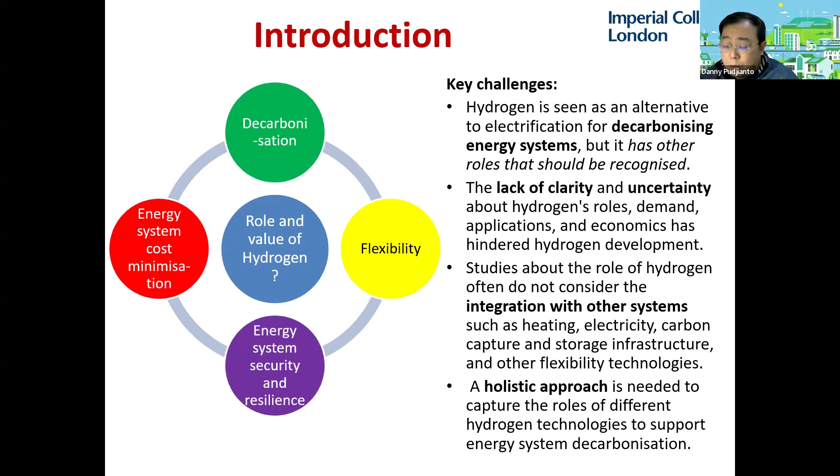So this is just to give the result of the studies that we carried out, analyzing two cases. One is the electricity system and the hydrogen system planned separately, which is what we call a silo approach. So in the electricity system, basically there will be no hydrogen technologies, no electrolyzers or hydrogen power generation. And we compare that with when we integrate hydrogen and electricity together, which we call the integrated approach. And we evaluate the annual system cost of these two systems.

And here we found that the integration of hydrogen into the electricity system can save quite substantially, around 5.6 billion pounds per year. If you look at the diagram on the right-hand side, the negative values reflect the savings that the system can obtain with hydrogen technologies. The positive costs are the additional infrastructure that needs to be built to support these hydrogen technologies. So hydrogen technologies, like electrolyzers and hydrogen power generation, will require additional low carbon technologies.

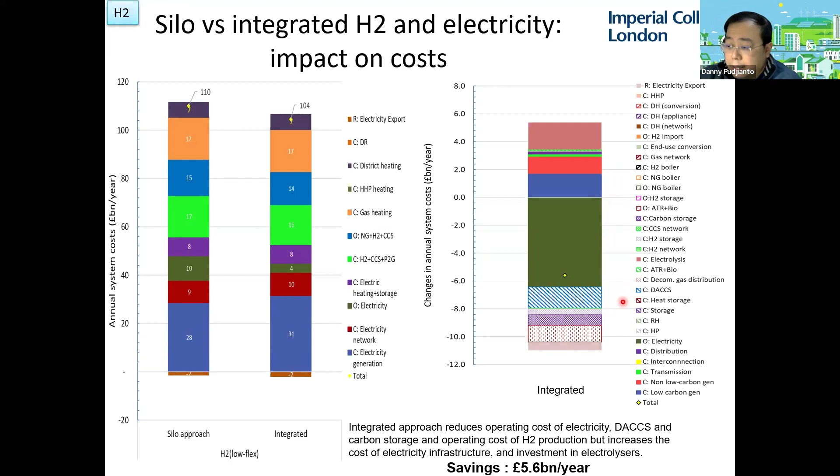So we can also see from these slides that by integrating the hydrogen technologies like electrolyzers and hydrogen power, the system can accommodate more renewable energy sources, like offshore wind, which increases from 86 gigawatts to 120 gigawatts, but also displacing, for example, the gas CCS.

So in the system where there are no hydrogen technologies, the system will require around 30 gigawatts of gas CCS, but then we can displace it totally with the hydrogen technology. So it's reduced to zero, while increasing the need for hydrogen power generation in that context.

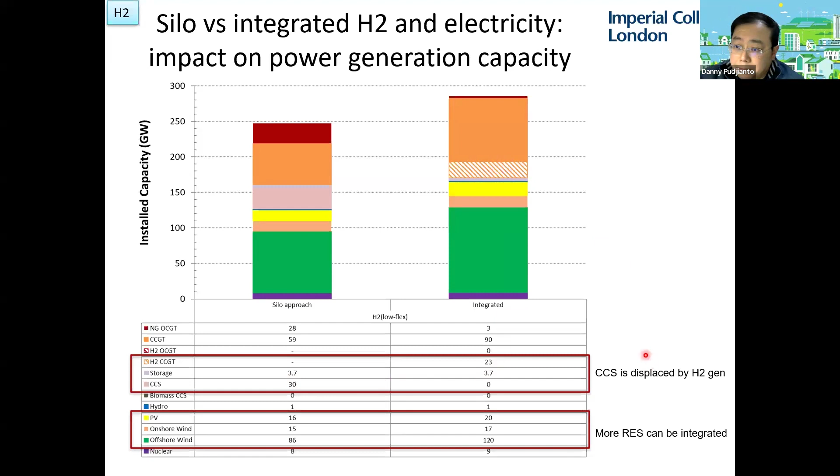So how should we analyze the system with hydrogen? So here we have developed a model called the integrated whole energy system model. It is a very large optimization problem which tries to minimize the overall energy system costs, including electricity, gas, hydrogen, heating, and also the CCUS infrastructure.

We take into account from the supply side and the energy network up to the demand side, but also some flexibility technologies such as demand side response, flexible generation, interconnection, and storage. We also model sufficiently the spatial granularity of the demand and the energy resources in GB, and also the interconnection between GB and Europe and Ireland.

And one quite unique feature of the tool that we have developed is that it also includes the distribution, where we represent the distribution networks as two types, rural and urban, in order to analyze the impact of hydrogen technologies or other low carbon technologies connected to those distribution networks. Because the impact is not only on the local distribution system, but will also affect the upstream system.

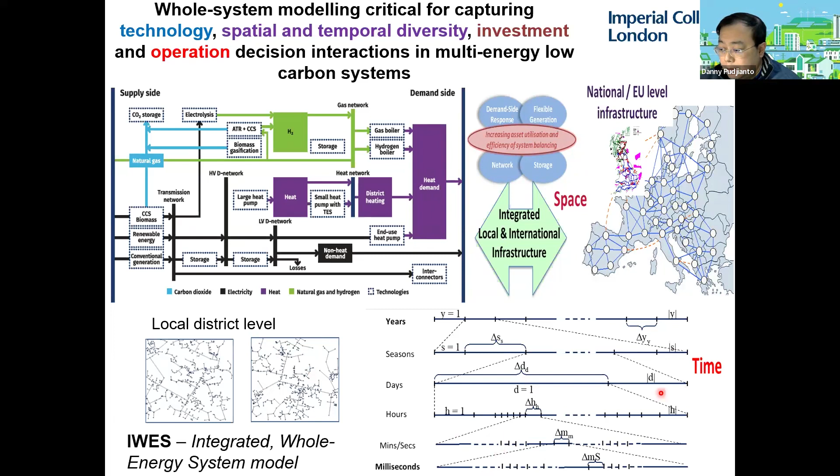So this is a list of the input data for the tool that we use. We take into account the load profiles for years for different types of energy demand, like electricity, space and hot water heating, transport, for both domestic and non-domestic sectors. We take into account all the technologies from power generation, hydrogen production, hydrogen storage, hydrogen transport, and so on, and we also consider the CapEx and OpEx of all of those technologies.

We also take into account the constraints associated with the scenarios that we analyze, for example, the emission target or the export-import energy policies. Now the output data: from the modeling, what we are after is to understand the optimized multi-energy infrastructure portfolio proposed by the model, and how the multi-energy operation should be coordinated.

And then, of course, we can evaluate the techno-economic performance of the technology, the fuel usage, how much carbon capture and storage there will be, the residual emissions that need to be offset, energy exchange, capacity sharing across regions, and also the flexibility technologies that need to be deployed, considering all this multi-energy sector coupling flexibility.

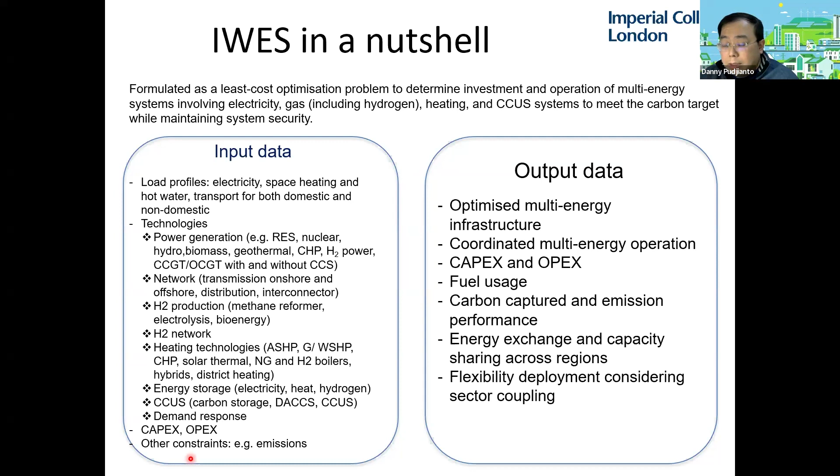Now for the case studies, here we focus on the 2050 future energy scenarios. We take one of the National Grid future energy scenarios called Leading the Way, which has the most ambitious target in renewable energy and customer participation in providing system flexibility.

In preparing the scenario, we understand the requirements for the system in order to meet the extreme events, which happen very rarely but need to be considered in the system planning in order to ensure that sufficient energy system capacity will be provided to meet the peak demand and to withstand that kind of event.

So we have inserted a few days of very cold conditions with low renewable energy sources to test the system's resilience. And in that context, we can then evaluate the role of hydrogen in providing resilience to the system. And then there are a number of other details like that.

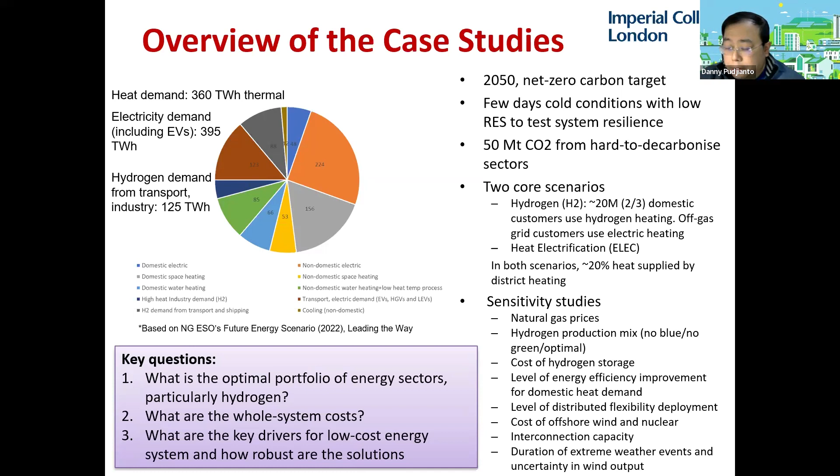And this slide shows the hydrogen portfolio of these two core scenarios, hydrogen for heating, H2, and full heat electrification, ELEC. You can see that hydrogen power generation technologies, hydrogen CCGT and hydrogen OCGT, have been proposed by the model, which means they are quite competitive against other power production technologies. In addition, there are hydrogen production technologies, like autothermal reformers with CCS producing blue hydrogen, electrolyzers producing green hydrogen, and hydrogen from biomass energy with CCS, plus some hydrogen storage, as you can see.

And the last two columns in the table show the utilization of these hydrogen assets. What we can learn from this study is that hydrogen technologies are actually quite competitive against other low carbon technologies, because the model shows that we require this much hydrogen technology in order to minimize the overall system costs. There are around 104 gigawatts of hydrogen power and production capacity proposed here, irrespective of whether it's hydrogen for heating or full heat electrification, and around 6.4 of hydrogen storage needed.

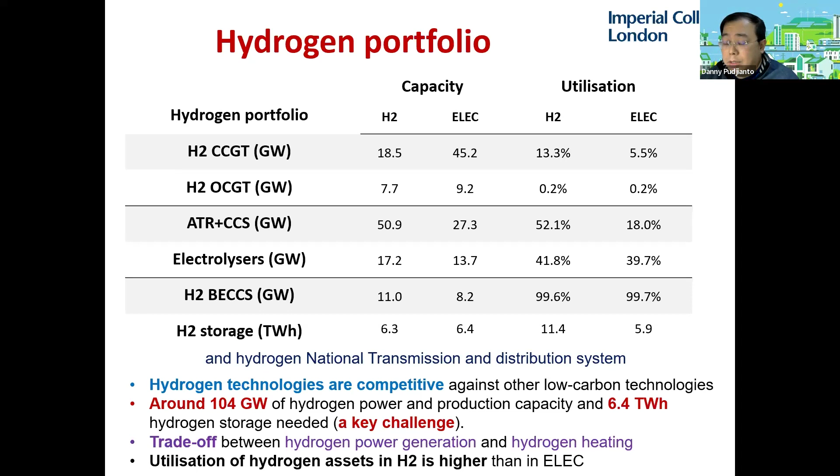So this slide shows the role of different hydrogen technologies. Different hydrogen technologies will have a different role in the system, and they have to play together in order to optimize the whole system operations. And this synergy has to be taken into account.

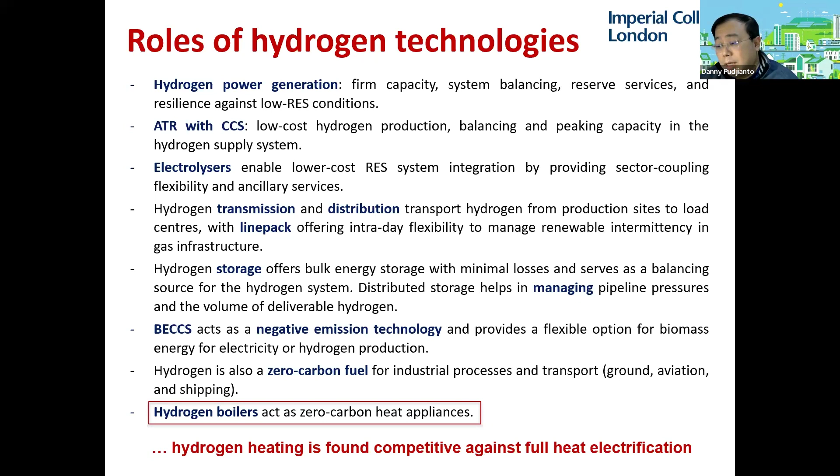Just to highlight one, the hydrogen boiler as a means to decarbonize heat in the domestic and commercial sectors can also play a part in the synergy with the whole hydrogen system. So the study shows that hydrogen heating is actually quite competitive from an economic point of view against full heat electrification.

Now from the model, we can also analyze the annual system costs for these two different scenarios. With hydrogen for heating, you can see that the annual system cost is 85.6 billion. This cost includes the whole electricity sector infrastructure, from the capex and opex of electricity generation, network, electricity storage, and so on.

This also covers the cost of the hydrogen system, from the hydrogen and carbon capture and storage system, capex and opex, the heat infrastructure, and the cost of the flexibility technologies required, such as demand response. We can see that with hydrogen for heating, the annual system cost is lower compared with full heat electrification. It is primarily because, and we will discuss this in more detail, the cost of electric heating, in this case the heat pump, is quite large.

The right-hand diagram shows the primary energy supply for both scenarios. Hydrogen for heating will require more than 1,000 terawatt-hours per year, compared with around 840 terawatt-hours per year in full heat electrification. That's expected because heat pump efficiency is much higher than that of the gas boiler. So the overall energy system efficiency in full heat electrification is much higher, more than 100%, compared with around 80% for hydrogen for heating.

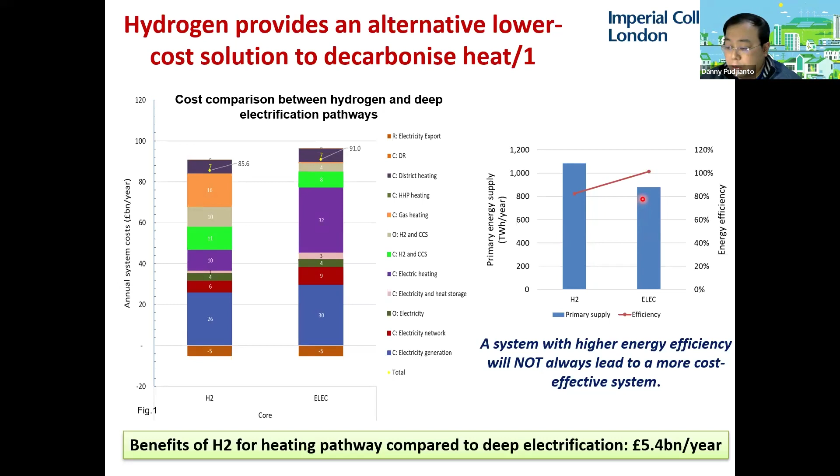But because this is achieved by investment in more expensive heating technologies, and the system integration cost of the heat pump is much higher compared with the hydrogen boiler, the cost of the system is actually higher in this context. So a system with higher energy efficiency will not always lead to a more cost-effective system. That's one of the key findings of the studies that we carried out.

So this is the difference between hydrogen for heating and full heat electrification. With hydrogen for heating, we can reduce the need for investment in low carbon generation and distribution, associated with the smaller electricity peak demand. We can also reduce the investment in heat pumps, which is quite high, and other electric heating, and also the flexibility requirement to support the heat pump, such as heat storage.

But on the other hand, we have to increase the investment in blue hydrogen production from autothermal reformers with CCS, there will be some increase in carbon storage requirements and in the use of gas to produce hydrogen, plus investment in hydrogen boilers, and we also have to maintain the gas network.

So this slide shows the impact of these two different scenarios, hydrogen for heating and full heat electrification, on the power generation capacity portfolio, where we can see that in the heat electrification scenario, there is a significant increase in the requirement of the generation capacity associated with the increase in the electricity peak demand, which is shown on the right-hand side. So in the full electrification, the electricity peak demand increased to 115 gigawatts, while in the hydrogen heating, this is only up to 87 gigawatts.

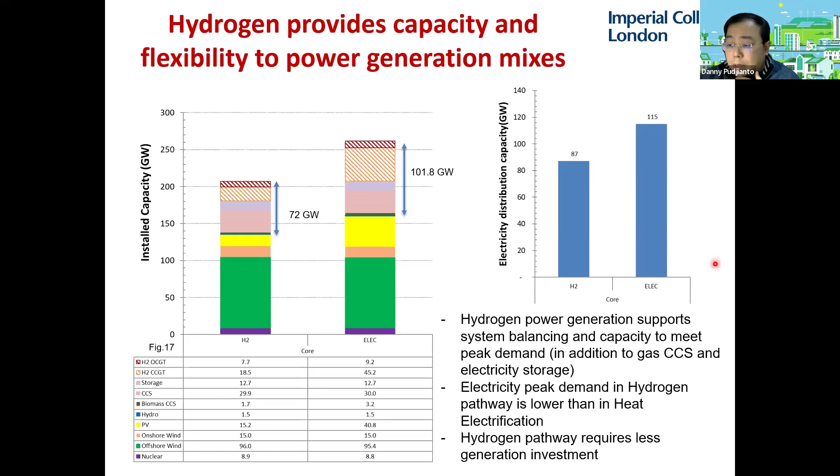So this slide shows 7 days in the winter peak week, where the system is stressed on day 16 to 18 because of very cold conditions. So the temperatures plummeted to -6 something, and at the same time there is no wind. So you can see that the offshore wind here produces very little compared with the

normal days. So in order to cope with this event, the system has to start operating with the gas CCS, but also with the hydrogen power generation here, in addition with some support from the interconnection, importing power from the neighboring countries. While on the other hand, when moving to the next day, there is a significant wind output increase, and then there is a balancing issue in this context, where the electrolyzers will be able to support the supply-demand balance by absorbing the excess wind output and producing hydrogen.

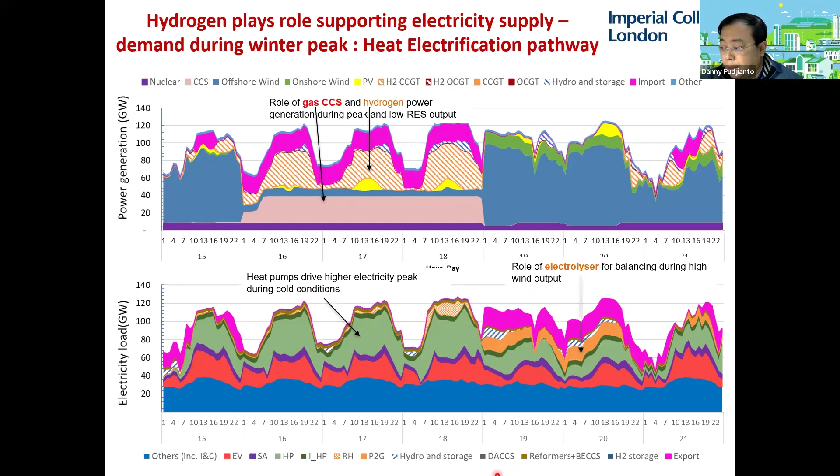So from the model, we can also analyze the demand and the supply of hydrogen. The demand for hydrogen in the hydrogen for heating scenario comes from three main sectors. One is hydrogen used in power generation, which is relatively small compared with the overall annual hydrogen demand. And the biggest demand actually comes from hydrogen for heating at 230 terawatt hours, while there are 125 terawatt hours per year associated with hydrogen demand from industrial processes, large transport, shipping, aviation, agriculture, and so on. While in the full heat electrification, of course, this demand disappeared.

And the right-hand diagram here shows the optimal hydrogen production portfolio, where we can see that 232 terawatt hours will come from blue hydrogen, and this of course depends on the gas assumption that we use in the study, which uses the projection from National Grid in 2050, and 63 terawatt hours from electrolyzers, green hydrogen, and 96 terawatt hours from biomass energy with CCS producing hydrogen.

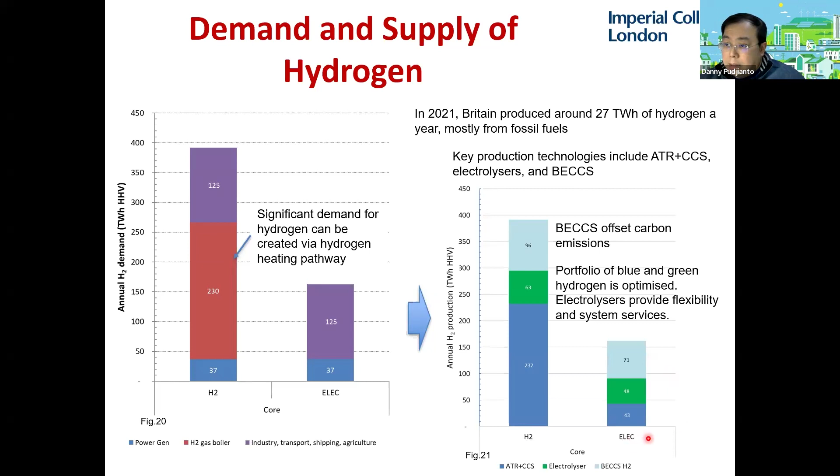And this is the optimized hydrogen production mix, and this is the capacity associated with the hydrogen production on the previous slides. But this is the capacity factor, and I would just like to highlight that BECCS producing hydrogen uses almost 100% capacity factor, because the availability of biomass is quite limited, and this provides negative emissions. This can be considered a negative emission technology, which is needed to offset the emissions from the hard to decarbonize sectors, and this operates fully flat

the whole year round. While the ATR with CCS hydrogen technology in the hydrogen heating scenario has around 52% capacity factor, but much lower, less than 20%, in the full heat electrification. But this capacity will still be needed in order to support hydrogen power generation during the peak demand period.

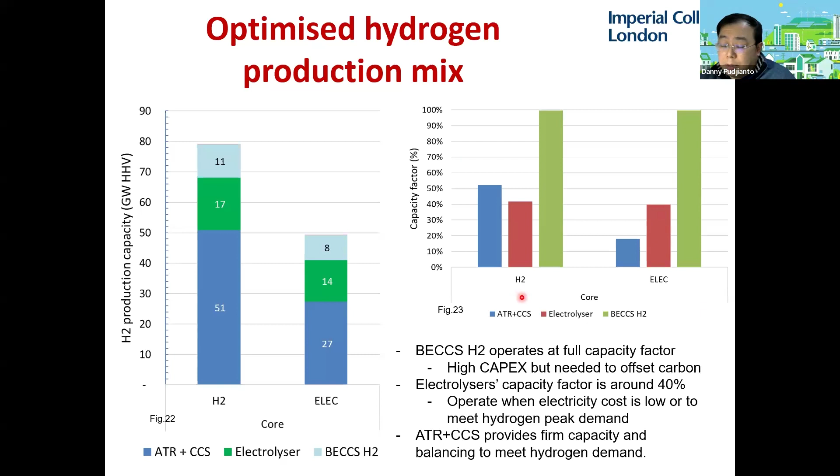So this is again highlighting the need to see the impact on the whole system, and how in the hydrogen heating scenario there is a synergy with the hydrogen heating, which then increases the utilization factors of the other hydrogen assets.

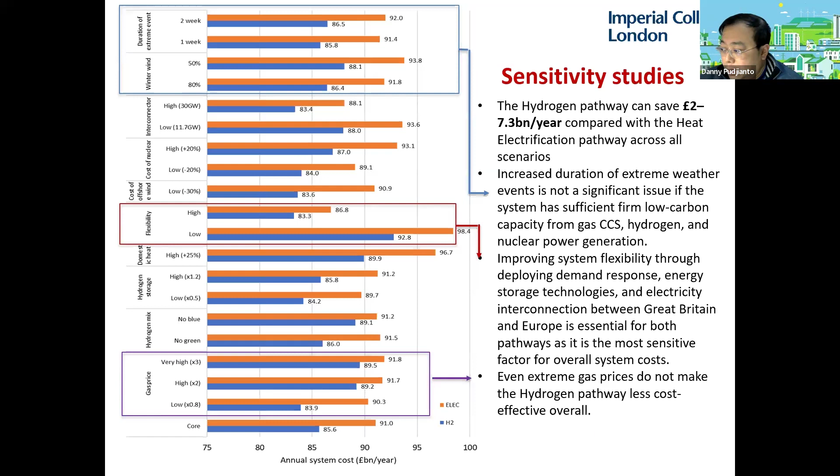So sorry for a bit of overrun, but this is just the final slide. It's a conclusion. From the studies, we concluded that hydrogen will play a crucial role in cost-effective energy system decarbonization, but we have to take into account all the roles of hydrogen, not only for energy decarbonization, but also to provide flexibility and to improve energy system security and resilience against extreme weather events, in order to minimize the overall system cost.

So all hydrogen technologies will have specific functionalities, but they have to work in synergy with other low carbon technologies. And one of the key findings is that we found that hydrogen heating is quite competitive against full heat electrification from the techno-economic point of view. And the results are actually quite robust, even in the case of extremely high gas prices. And from all these sensitivity studies, the hydrogen pathway can save between 2 to 7.3 billion per year compared with the heat electrification pathway, depending on the scenario.

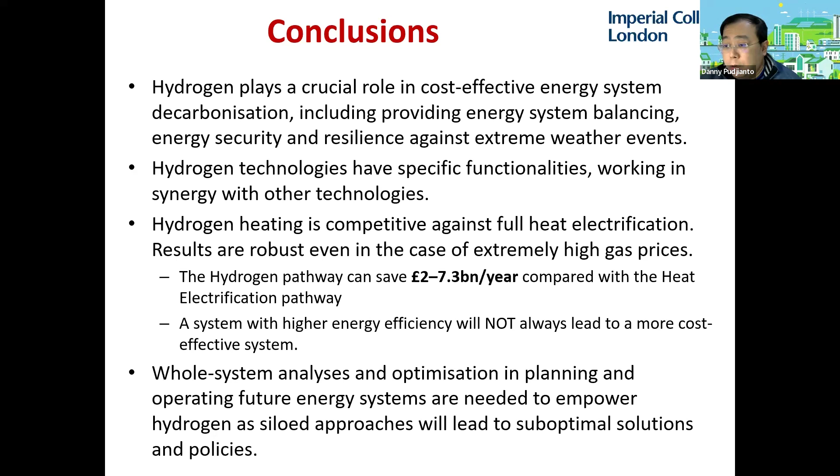And another point to re-highlight is that a system with higher energy efficiency will not always lead to a more cost-effective system. And whole system analysis and optimization in planning and operating the future energy system will be needed in order to empower hydrogen. Because if we consider hydrogen, whatever the application is, with a siloed approach, that will lead to suboptimal solutions and also suboptimal policies.

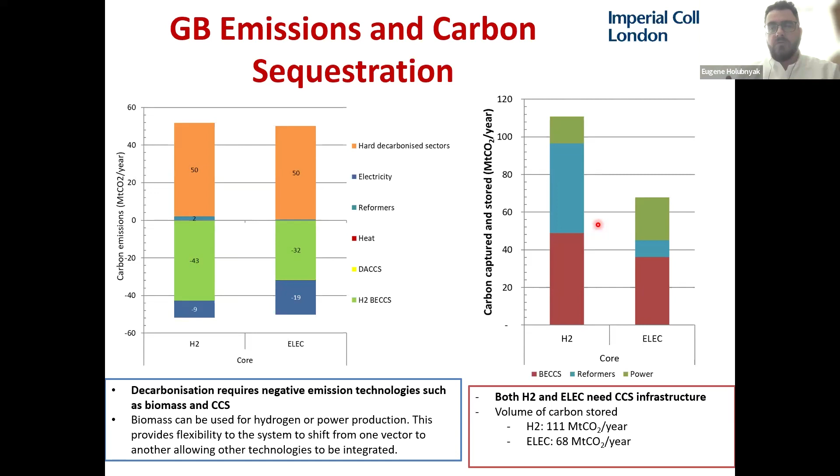But my question would be, if you looked deeper into a more holistic view of the carbon cycle within the system, and if you have any idea what would be better: do you think autothermal reforming with CCS, regardless of how much you need to store, can be compared to electrolysis today? Not in 30 years, but today.

I think this is a very good question. So if I capture the question correctly, the model can also capture the impact of distributed hydrogen technology. So for example, if you put the electrolyzers or the fuel cells at the distribution, how this will impact the distribution network capacity requirements. That's not in my presentation, but we have other studies that address those kinds of questions. So the impact on the electricity distribution is also part of that.